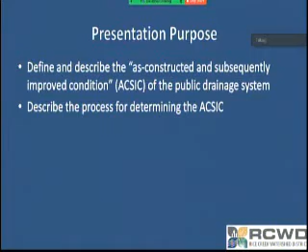Again, Anoka County Ditch 10-22-32 is a public drainage system that flows generally from north to south through the southern portion of Columbus and down into Lino Lakes where it outlets into Marshan Lake. The report and the current proceeding that we're working on is intended to provide evidence that the district can utilize to manage the drainage system. And essentially, we're trying to reestablish those records so we have a complete record on the drainage system to determine that as constructed, subsequently improved condition. And right now, we're focused solely on that portion of the drainage system that is in Columbus, that area that is north of Pine Street, which I have on this graphic here circled in yellow.

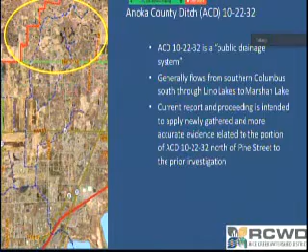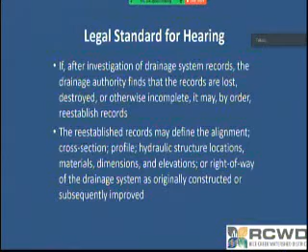The legal standard for the hearings, these are right out of Minnesota Statute 103E.101 Subdivision 4a. It says, if after investigation of the drainage system record, the drainage authority finds that records are lost, destroyed, or otherwise incomplete, it may by order reestablish records, and that the reestablished records may define the alignment, cross-section, profile, hydraulic structure locations, materials, dimensions and elevations, or right-of-way of the drainage system as originally constructed or subsequently improved.

So as I've alluded to already here, the purpose of reestablishing these records is to have that collective record with which the drainage authority may be able to manage the drainage system. And that is due to the fact that over the course of history, there's been a lot of records that have been lost along the way. And we need to provide clarity on this historic record so we can identify what the greatest evidence is of that as constructed condition. And as I mentioned here, that includes the alignment of the system, the profile, the cross-section of the drainage system, and a right-of-way.

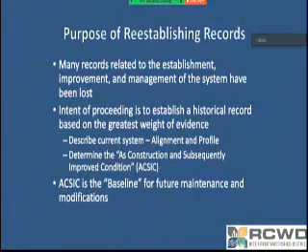And this as constructed condition serves as the baseline for future maintenance and modifications. And what I mean by that is this is the elevation with which the drainage authority knows that it cannot excavate or go to greater than that. Otherwise, it turns into something that is other than a repair, what could potentially be considered an improvement.

So the background on these records, back in 2010, the district did complete an investigation of the historic records of multiple drainage systems referred to prior to this as ACD 10, ACD 22, and ACD 32. And at this time, it was actually working underneath statutes that are different than what currently exists for the reestablishment of records. Again, that 103E.101 Subdivision 4a. So this is prior to the development of that statute, which identified this process that we're working under now. So as such, the as constructed subsequently improved condition wasn't identified at that time.

Instead, the district did identify and apply in system management with regard to what we called a functional alignment, which was used to determine what the equivalent function would be to the as constructed condition. And part of the reason why we looked at this functional alignment was how much the drainage system, and specifically that area south of Pine Street, how heavily modified it was compared to its original condition. But again, the focus of that effort was primarily on that area that's south of Pine Street at that time.

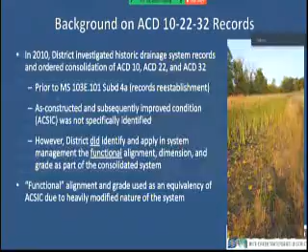As the district's completed repair activities over the last 10 to 12 years, the historic bottom of the drainage system, as we've completed as-builts of the maintenance efforts, has been identified as being lower than that functional grade in some locations. And in particular, it was found to be lower in that area that is north of Pine Street. We did identify that in this area there's been a lot less modification in terms of alignment of the drainage system than there was on that area south of Pine Street. And that has a lot to do with why this historic bottom was lower than that functional grade.

In October 2020, the Watershed District requested Houston Engineering to prepare a review of that as constructed and subsequently improved condition for that area north of Pine Street, again, based on the fact that we have identified that the historic ditch bottom was lower than that previous functional profile.

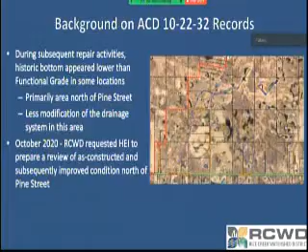So in order to complete this review, we completed a field survey in October of 2020. We took a number of soil borings and probes of the drainage system along the main trunk, branch 4 and branch 4A. These are portions of the drainage system that are located north of Pine Street. And then what we did was take these borings that we completed out in the field along with survey elevations of the current channel bottom and compared those to the historic plans from 1894 and 1898 when County Ditch 22 and County Ditch 32 were originally established.

And we determined then the as constructed grade by looking at that historic plan grade and comparing that to the soil borings and seeing if we could find a correlation between the two. And there's one portion of the drainage system where we did find a good correlation, one portion where we found very little correlation between the soil borings and that historic plan grade from 1894 and 1898.

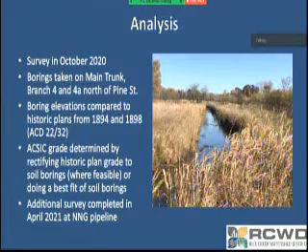Then we also completed additional survey of the drainage system in April of 2021 at the location of the northern natural gas pipeline where it crosses the main trunk of Anoka County Ditch 10-22-32 just to the east of Jodrell Street.

So in addition to that information we completed in 2020 and early 2021, we had a number of events that followed since the time of the prior public hearing on June 9th, 2021. So we did complete our engineer's report prior to the public hearing and then had that June 9th public hearing. On July 29th, the Board of Managers reopened the proceeding to allow for submission of additional relevant information related to the historic drainage system record.

Then on October 1st, Houston Engineering completed a review of the additional documents that were provided in that reopening of the proceeding. On October 11th of 2021, this documentation was presented to the Board of Managers at a board workshop. And at that time, the Board of Managers requested the engineer to complete additional field investigation at one particular location on the drainage system, which was just east of Jodrell Street, approximately 500 feet.

And this was due to the fact that there was a location where, in the soil borings, there was a spacing and question about the profile in that particular location. So we did complete in the fall some additional field investigation, which I'll talk about in a minute here. And based on the information, we prepared an addendum to the engineer's report on January 13th of 2022, which provided an adjustment to that as constructed grade in that area near Jodrell Street based on that additional information.

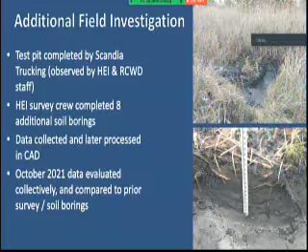And what we concluded based on that field investigation is that the soil borings are relatively consistent in grade in that area where we completed those additional borings. That test pit did indicate that the as constructed channel is in alignment with the observed channel bottom at the surface. So there hasn't been a shift in that alignment. So we believe that these additional borings are fairly accurate to determine that original channel bottom.

And what we further determined, based on those additional 8 borings, was that we could add additional precision in our as constructed channel bottom by lowering the grade on our profiles by a half a foot compared to what we had previously determined in our engineer's report back in May of 2021.

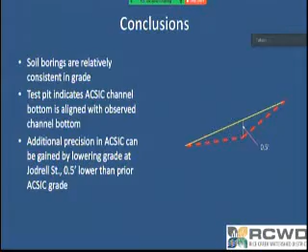That is what our recommendation was within our subsequent addendum to our engineer's report that we prepared in January. Here's a graphic showing that difference. In the graphic, there is a solid black line, and hopefully my cursor will be able to show up on the screen here, or maybe not. We can see it.

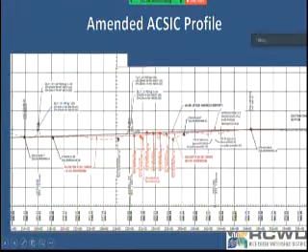Okay. So the black line shown on here is that profile that we had determined in our original determination in May of 2021. And the red line that we have shown in here is the adjusted elevation or profile of the drainage system by lowering it a half a foot at Jodrell Street based on these borings that we completed in the fall of 2021. Those borings are shown as these red markers on the screen here, and you can see that our as-constructed grade follows fairly closely with these soil borings that we took along here, relatively speaking.

So I'll talk a little bit about what we've determined overall between our original engineer's report from May 2021 and our subsequent addendum. Showing here now on the screen the portion of County Ditch 10-22-32 just to the north of Pine Street, the main trunk. A couple of things I can point out on the screen here. On the left-hand side, we have the culvert at Pine Street, and you can see that culvert at Pine Street is substantially higher, nearly 2 feet higher than the as-constructed grade at that location.

We show on here the Koch pipeline that is crossing the public drainage system a little bit further to the north. And if you get further north than that, we can see 137th Avenue, where there's also another culvert there, which is, I believe, a little over 1.5 feet above the as-constructed grade of the drainage system.

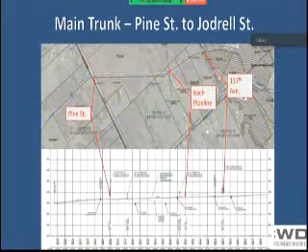Moving a little further upstream in the portion of the main trunk that flows from east to west. On the left-hand side of the screen, you see Jodrell Street, and Jodrell Street is, I believe, about 1.5 feet above that original channel bottom in that location. The Northern Natural Gas pipeline crossing is located a little further to the east of Jodrell Street. And then there's also a field crossing that we have shown on here that is closer to the very upstream end of the drainage system. And that field crossing, since the time of our survey out there, has been lowered.

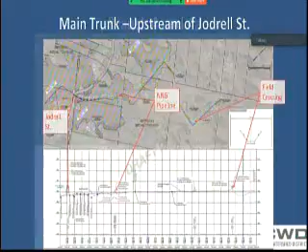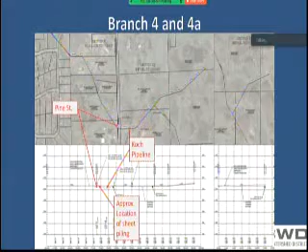And then moving on to branch 4 and 4A, these are a little further to the east from the main trunk crossing of Pine Street. As we look to the north here, we again show the Pine Street crossing on the map here. I'll point out that the Koch pipeline also crosses the public drainage system in this location, so we have pointed that out on the drawing here. And then we also pointed on here the approximate location of a sheet piling that was temporarily installed across the drainage system here, and that's the subject of a wetland replacement plan that has been applied for to allow for the removal of that sheet piling.

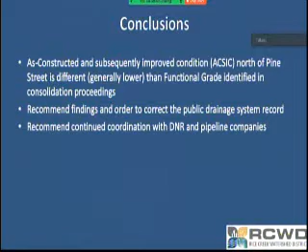So our conclusions are that the as-constructed, subsequently improved condition of the drainage system north of Pine Street is substantially different and generally lower than the functional grade that was identified in the previous consolidation hearing for the 10, 22, and 32 drainage systems from back in 2010. So we do recommend that findings and order be issued to correct the public drainage system record. And we continue to recommend additional coordination with the DNR and pipeline companies regarding additional activities to maintain the drainage system. And with that, I can address any questions from the board if you have any for me.

Any questions from the board? John? Mr. Bradley? Any questions? Well, hearing no questions, we'll move on to the next thing. Oh, Mike, did you have any questions? I didn't see I was muted. My answer was, thank you, I had no questions, Madam President. All right, thank you. Okay, so we'll move on. What's that, Tim? Oh, okay, Mr. Olson? I think that's the cursor. Oh.

All right. So still seeing none, we will go to the public. Is there anybody in the public that would like to comment to the board? Anybody in the public that would like to speak tonight? Okay, hearing none, we'll continue on. I'm just wondering if any of the people, nobody out there wants to speak. I want to make sure for the record. Okay, well, with that, being no further testimony from the public. Oh, wait a minute, we did receive a letter that needs to be put into the minutes.